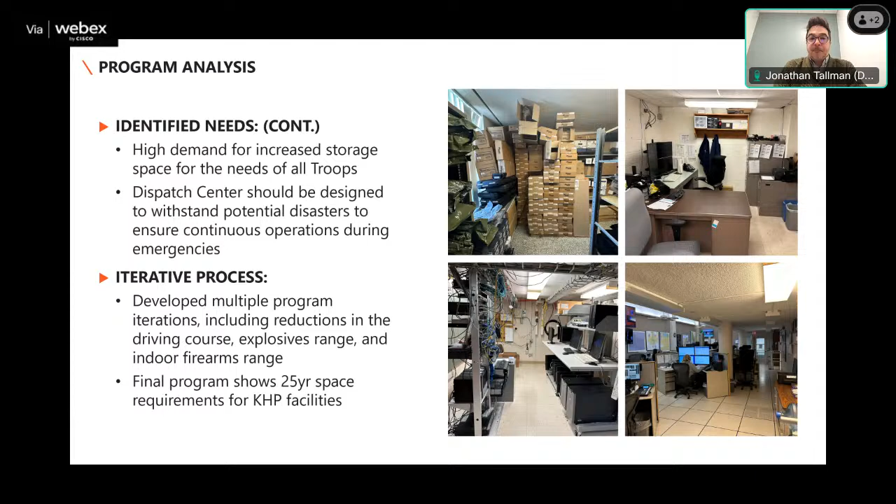The entire process ultimately showed there is a need for increased program. If you go to the next slide, please. And that program is for the next 25 years.

Operational efficiencies we talked about for a second, but just you can see here graphically from the main campus, there's 3 other sites that the troopers need to go to in order to get the required training and locations that they need. So that does equate to less time in training and less educational hours for troopers and recruits.

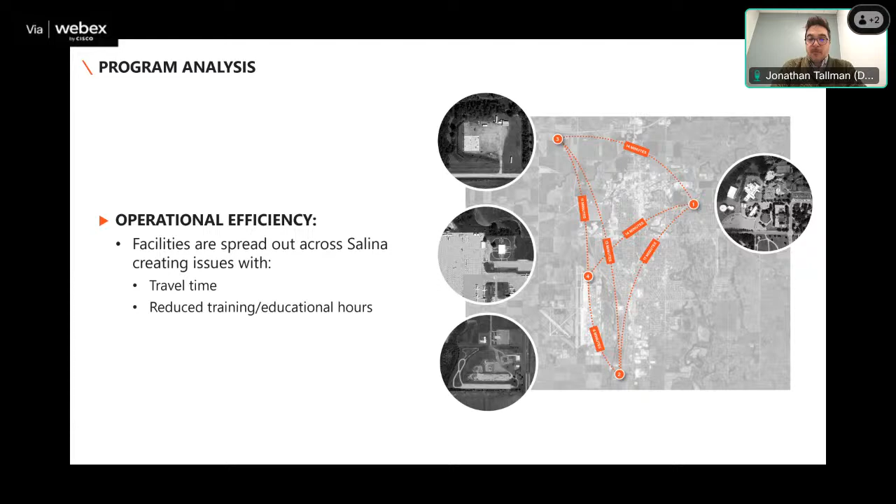Next slide. And then the detailed program - it's a room by room summary stating the space that is needed, how big the room needs to be, along with notes on the right-hand column, really defining what those technological needs are or equipment needs are for those spaces, and giving a general description of that need and why.

Next slide. So today on the Marymount campus and the 3 other locations, there exists 188,000 square feet. The program developed by our team projects a need of 375,000 square feet. The existing land across all the campus locations is 60 acres.

Marymount campus is right around 26 acres, if I remember correctly, and the projected 25-year need to bring everything into one location would be 187 acres.

Thanks, Jonathan. So that's essentially the program that was developed looking at that 25-year need for the Kansas Highway Patrol in Salina. We also went through a facilities assessment. We walked through each of the buildings to determine their general condition and suitability for long-term use. Some of the general findings: number one, lack of security.

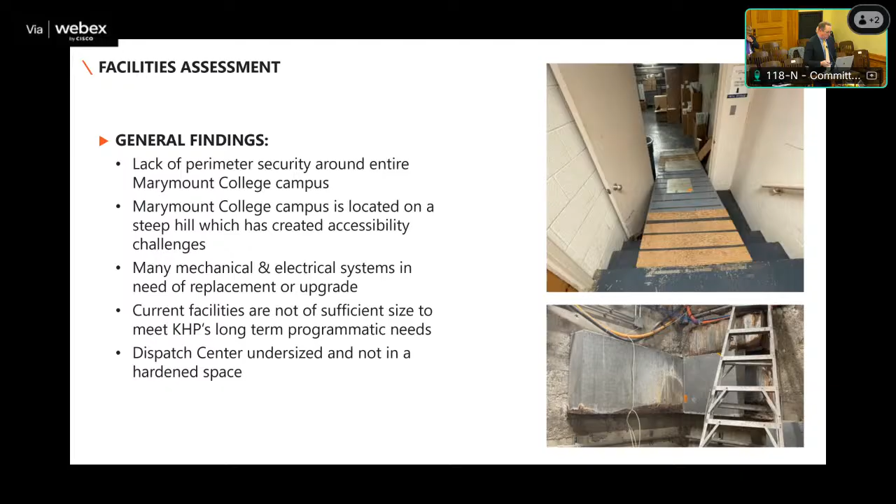And then lastly, on this slide, the dispatch center - high priority for the Highway Patrol. It's undersized for its current need and long-term need, and it's also not in a hardened space, so it is susceptible to, if a large storm event was to go through, it would take down the Highway Patrol's dispatch facilities.

We went through a scoring analysis for each of the buildings, and you can see the criteria on the right - all the elements we looked at: architecturally, mechanically, electrically, structurally. And then the scoring ranged from 1, being major renovation or replacement, all the way to 4, being excellent. And then we developed a composite score for each building.

As we went through that analysis, you can see all the buildings on the right. Only one building scored 3 or above, being adequate to excellent condition. That is the Central Evidence Facility. It's a building that's only a couple years old, so we would think that it would be in great condition.

The next layer down, buildings needing minor renovation, scoring in that 2 to 3 range, the driving course building scoring 2.2, just barely above that 2 threshold. And then the remaining buildings all scored less than 2, meaning needing major renovation and/or replacement.

So with all that data, we wanted to look at options, ideas for what Kansas Highway Patrol could do moving forward to accommodate meeting both their long-term needs, whether it's on the current locations or a new site.

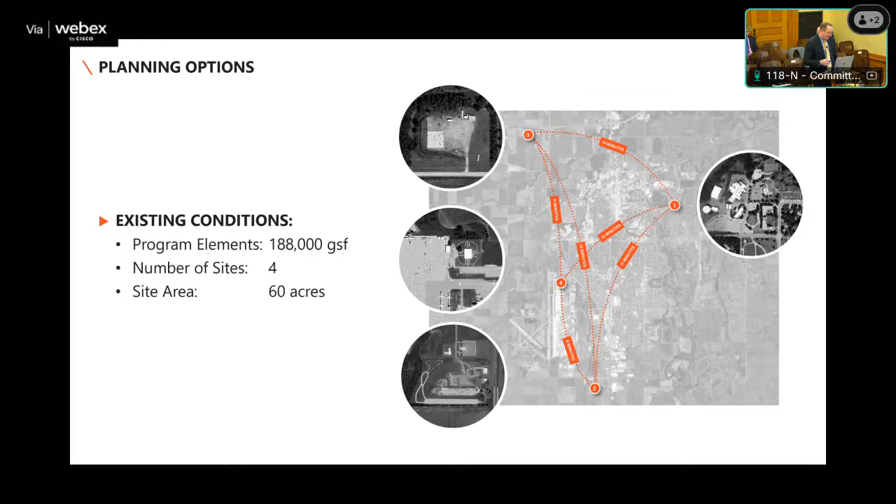So again, based on the existing conditions, 188,000 square feet, 4 sites spread across Salina, as you can see in the diagram to the right. Those buildings currently occupy about 60 acres of space across those 4 different locations. And as Jonathan noted, to meet the 25-year need for the Highway Patrol, the program square footage needs to practically double to 375,000 square feet, with site area needing between 60 and 187 acres. We'll talk through why there's a difference in a second.

So planning option 1: you move everything. You vacate the current Marymount College campus, vacate the current space they occupy at Kansas Department of Transportation, vacate space at Kansas Highway Commission where the shooting range is, and vacate a current lease at the Salina Airport where Troop S is. All in, $443.6 million for that project, but it does accommodate the long-term needs of the Highway Patrol.

Some advantages and disadvantages of this option you can see in the column to the right. This consolidates all programs onto one campus, creating a lot of operational efficiency versus having to travel across town. It also vacates leased space and allows for the potential sale of the Marymount College campus. The con on this one is obviously the highest first cost.

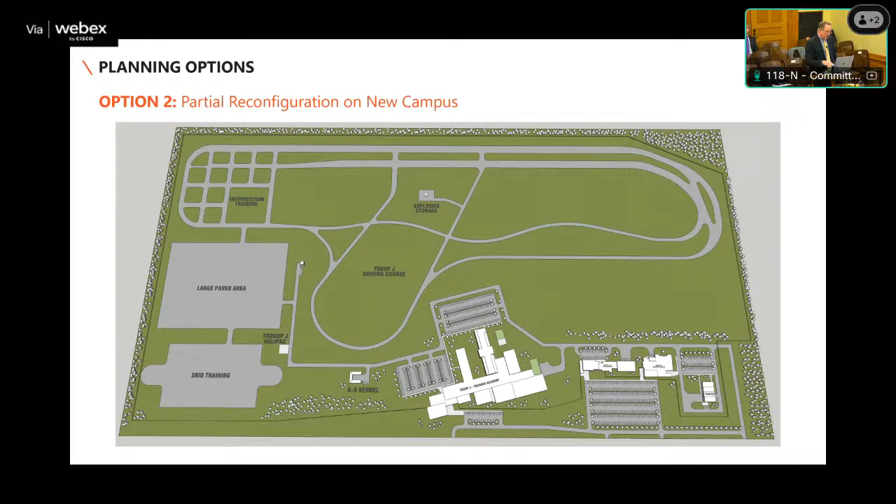Cons: operational inefficiency with not all the facilities being together, maintaining the firearms range and central evidence in their current locations. Again, a similar diagram to what was shown in option 1 — the only difference here is it does not include central evidence and does not include the firearms range.

Option 3 takes a little bit different tack. It looks at a total gross floor area requirement across all buildings at 346,000 square feet, 60 acres of space needed, at a cost of $327.2 million. Again, you maintain all the existing facilities except for the Salina Airport Authority lease.

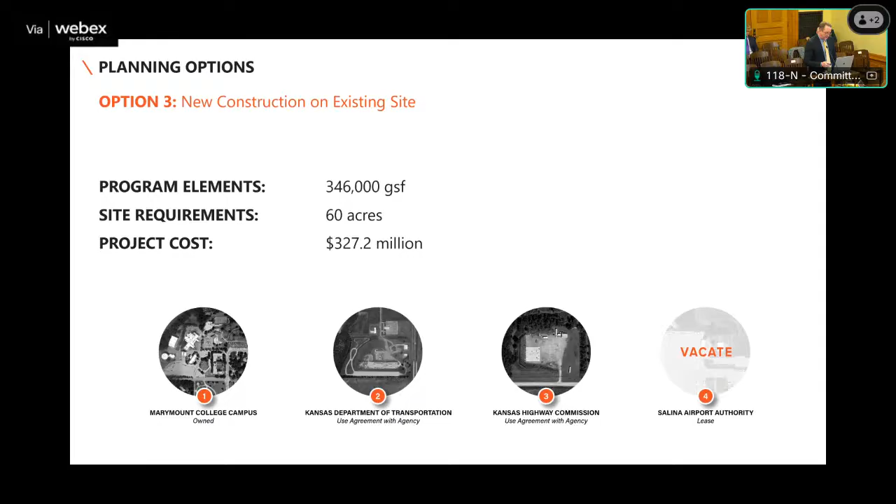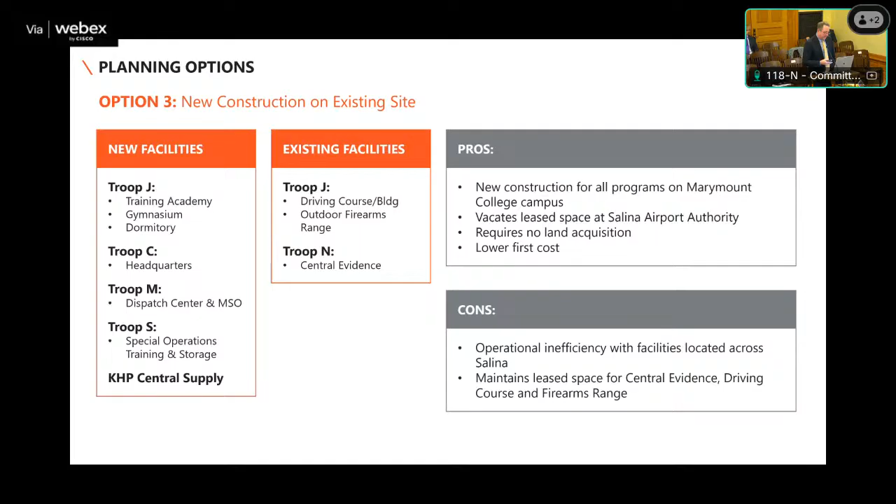On this one, pros being new construction for all of the programs on the Marymount College campus — we'll show that in a second. It vacates the lease for Salina Airport Authority, requires no additional land acquisition, and has a lower first cost than the first two options. Cons: you still have the operational inefficiency associated with being spread out in numerous locations.

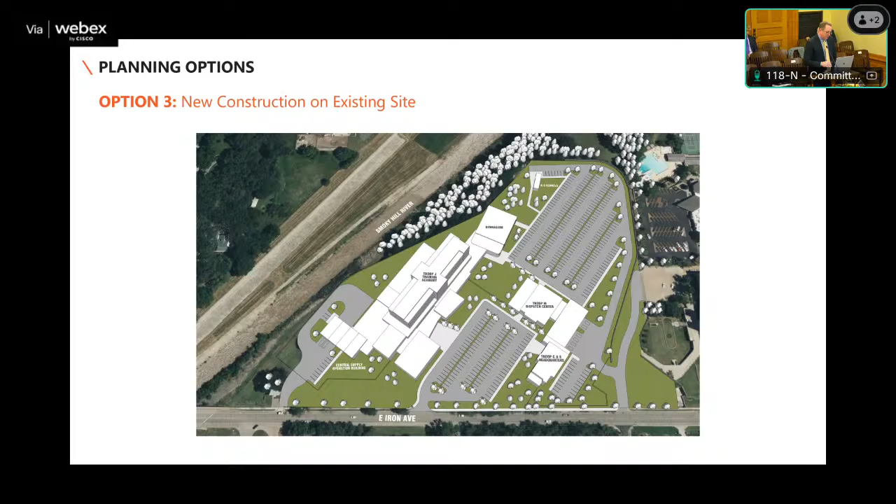So this is pictorially what it might look like — this is the Marymount College campus. It would propose relocating all the facilities to the west half of that current campus, requiring demolition of the existing buildings to then build back additional parking and some additional buildings. We believe everything can fit on this campus, and by getting to essentially one level, we can reduce any accessibility issues. We would also propose fencing the facility to provide better security.

Option 4 is essentially just fixing what you have, fixing the facilities, but not expanding them. We wanted to provide a wide range of options — this one says you just want to modernize what you have today: 188,000 square feet, that's what you have today, and that's what we're proposing at a cost of $116.4 million. The only space you're vacating is the Salina Airport Authority, Troop S, which would relocate to this campus.

The pro to this option is it has the lowest first cost, and it vacates the lease space for the Salina Airport Authority. The major con is it doesn't meet the 25-year need. It just fixes the facilities, but over the course of the next 25 years, the Kansas Highway Patrol will outgrow those facilities.

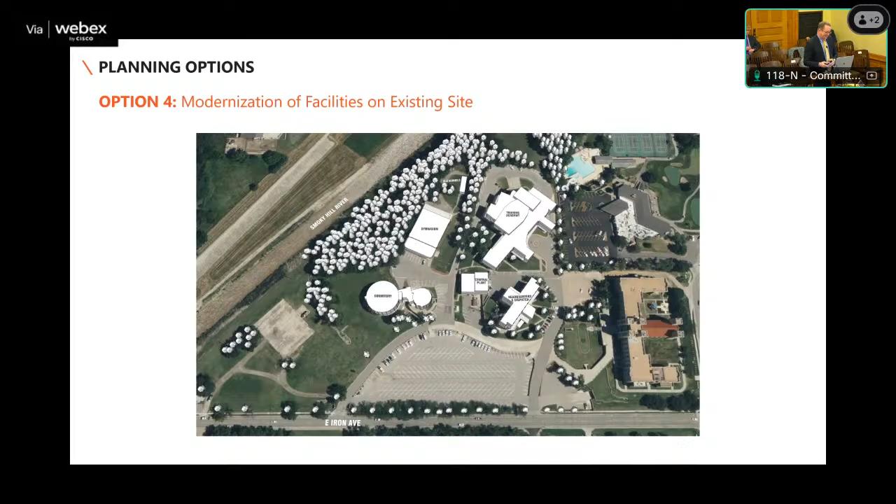This is just a diagram looking at the existing facilities as they sit today on that campus.

So in summary, there are 4 different options to consider. The first 3 meet the long-term needs of the Highway Patrol. Option 4 does not.

We were also asked to look at different sites for where a new campus could be. We investigated 8 different sites in and around Salina. I've added to the diagram where the current firearms range is, where Marymount College campus is, and where central evidence is in relation to these 8 sites.

We went through an analysis of each site and objectively looked at different criteria, both in site characteristics and accessibility and adjacencies. We weighted each of those and went through a scoring effort for each category for each site.

The outcome was that if you look at the scoring matrix, 3 sites rose to the top: KSU Salina, the Kansas National Guard, and the Water Well site. So sites A, B, and D were the top 3 scoring sites. These are images of what those 3 sites look like, and as you can tell, they all range in size.

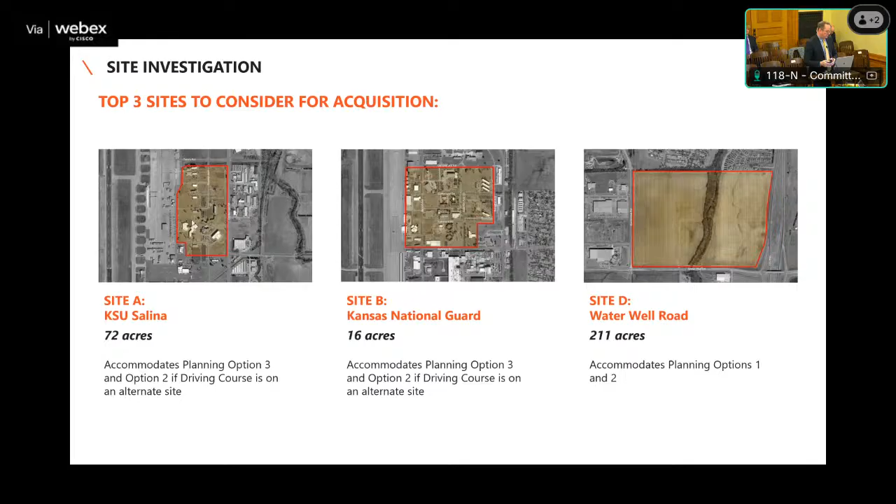So what is our recommendation? Of the 4 options, our team felt that option 2 made the most sense. It consolidates most of the programs into one location. Central evidence, again, we felt is in a good location within Salina, and the building is in great condition, so it did not make sense to relocate it.

The outdoor firing range is accessible to the troopers who are utilizing it for training, and while it would be convenient to have it as part of the campus, I think the Highway Patrol feels they can live with it being at an alternate location.

So with planning option 2, it does address the 25-year growth need for the Highway Patrol. It consolidates most of the elements into one location. It maintains the outdoor firearms range and central evidence in their current locations. It does require purchase or acquisition of new property in Salina, and it does allow for the sale of the Marymount College campus.

Of the top 3 sites, site D, the Water Well site, can accommodate everything. This just shows diagrammatically how that might work on that property.

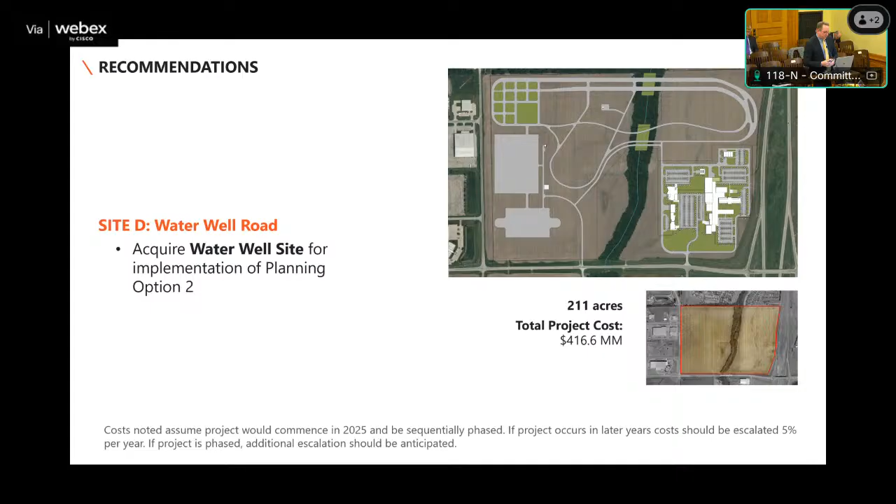Site B, the Kansas National Guard, can accommodate most of the program elements. The only thing it does not accommodate for option 2 is the driver's course, so a separate site would need to be acquired for that. Everything else can fit on this property.

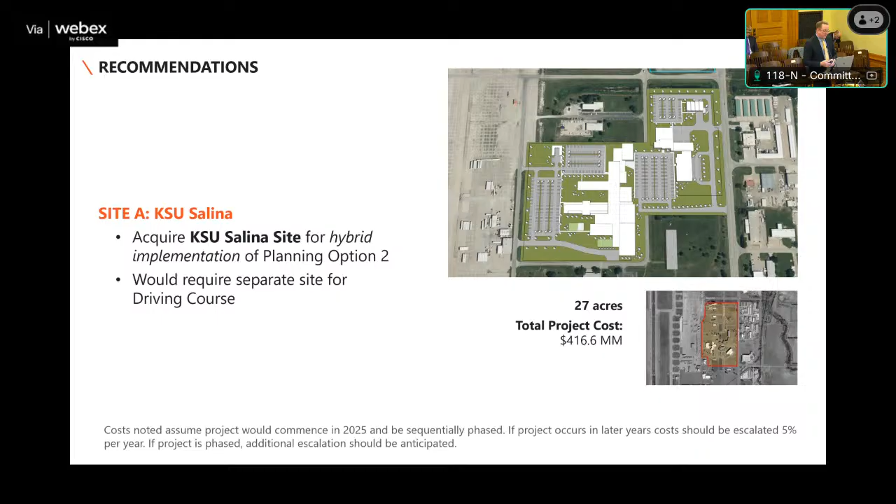Similarly, the KSU Salina site can accommodate all of those functions, and you can see all the buildings, parking, and elements fitting on that property in the diagram. Again, the driver's course would need to be separate. For the KSU Salina option, we determined there is land area directly adjacent to the north, on private property, where a driver's course might fit. That area is highlighted in red in this image.

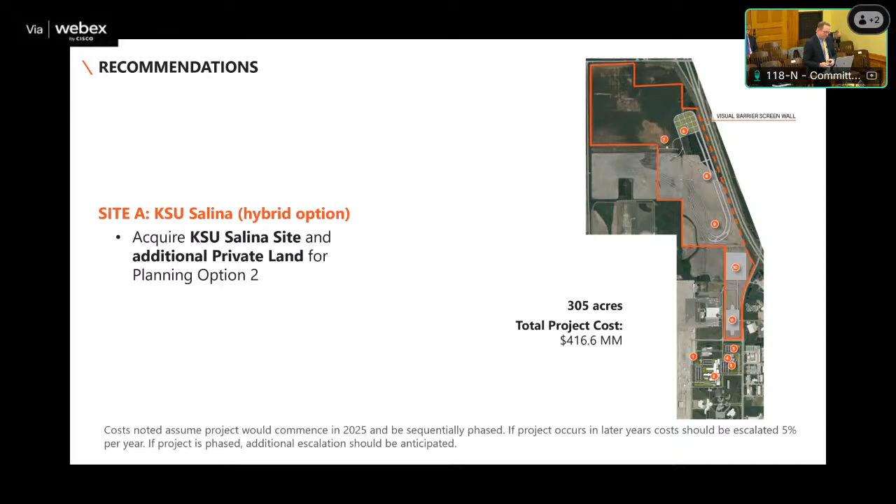Going back to site option D, which can accommodate everything, although all 3 could be considered, working with the Highway Patrol we determined there were different priority levels, so we developed a 4-phase approach. The highest priority element is the dispatch center replacement at $24.9 million. Phase 2, the next highest priority, is relocating Troop C headquarters and Troop S, at another $26.8 million.

Then the training academy at $258.5 million, and lastly the driving course, all totaling the $416.6 million that we talked about previously.

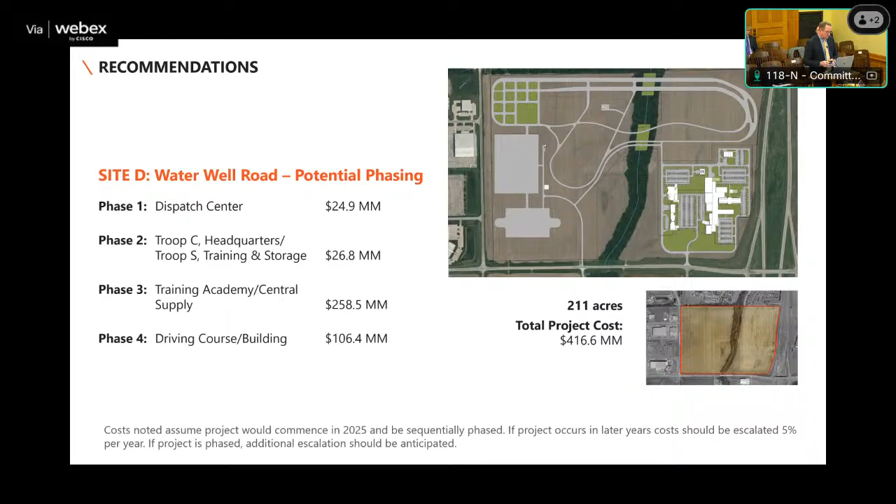So that is the summary of what we determined. I will open it up to any questions you might have.

Thank you for the presentation. Just a quick question. Looking at option number 3, I see that it says here to meet the 25-year needs assessment, 187 acres is about needed.

Does option 3 meet that requirement just because you're able to build up and that meets the square footage by building office space? So the main difference between option 2 and 3 is that on option 3, we're maintaining everything at the Marymount College campus. It does not accommodate the driver's course.

So one of the big challenges with option 3 is that it would require significant phasing, because the Highway Patrol occupies that campus today. To get it to essentially one level, there'd be a lot of excavation that would occur on that site, and the addition of retaining walls. So we propose that all of the functions would move to the west, and it would be phased over multiple years to build on that site. It'd be challenging, but we think it's possible.

Representative Bloom.